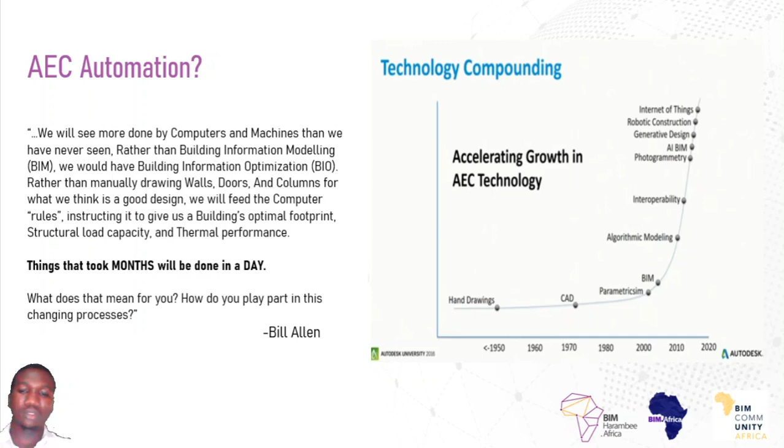So why AEC automation? Of course, we want to quit our boring tasks and automate our workflows, but I believe there's much more to AEC automation than just automating your workflows. So let's discuss AEC automation first.

When we discuss AEC automation, we can never neglect two terms: quality and time. When we discuss quality and time, we always think that when we try to automate our workflows, we get lesser quality because we spend much more time on our projects. Or sorry, we tend to spend lesser time on our projects, which is wrong.

AEC automation provides you the ability to get much better quality for your project in a shorter time. So taking a look at the two graphs below.

We have three projects, on the left without automation and on the right with automation. On the left, we have a base level of quality from automation and standardization, which is BIM. On the right, we had reduced diminishing returns and shortened project completion time frames, that is with automation.

So it's quite evident that all three projects took the whole time frame, and of course that doesn't guarantee much better quality for your project or a better result quality.

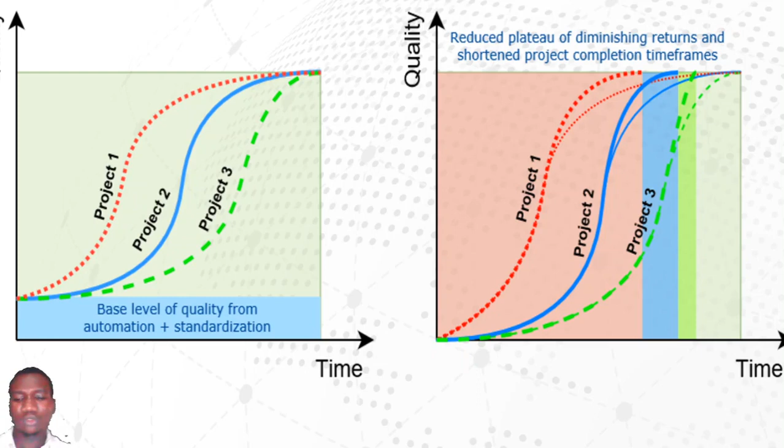So taking a look further, we have a bar chart where the first is no automation in the design process, and the second is with automation in the design process.

So from preliminary BIM modeling to detailed BIM modeling to information management to documentation, just imagine how much time was saved from automating your workflows. Of course, the reasons for automating your workflows are many, and this is just with regards to quality and time.

So when we discuss automation, take a look at documentation. Many of us tend to employ BIM, but we don't take full advantage of BIM. Just like with automation, we employ automation but don't take full advantage of it in the AEC space. If you look at documentation, a lot of us involve ourselves in what I would call Revit management, not actually BIM management, because we say we employ BIM in Africa, but we go through manual design processes and manual documentation processes.

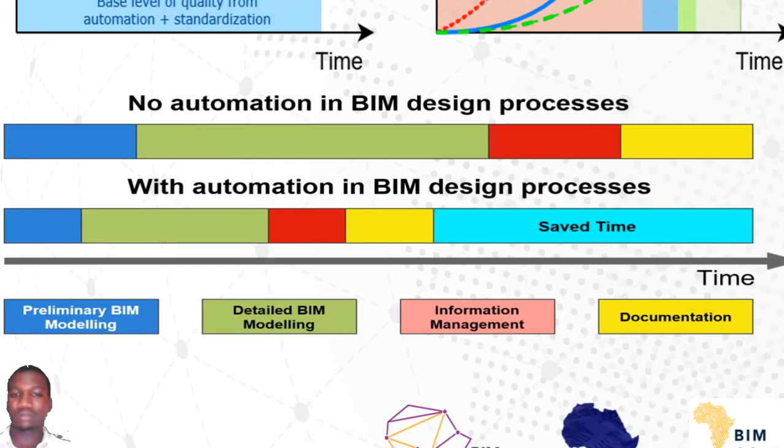So let's move on to why we automate our workflow, aside from just quality and time. Of course, it's a great way to upskill, to standardize your projects, to improve accuracy, eliminate risks and redundancies, enable parameterization, easier collaboration, and increase speed, efficiency, and productivity, among many others.

So these are just a few reasons, aside from quitting the boring tasks, for why you can automate your workflows. Imagine, it's a great way to upskill so you don't become irrelevant to the AEC industry over time, to create standards for your projects, to improve accuracy, and eliminate risks of human errors and redundancies.

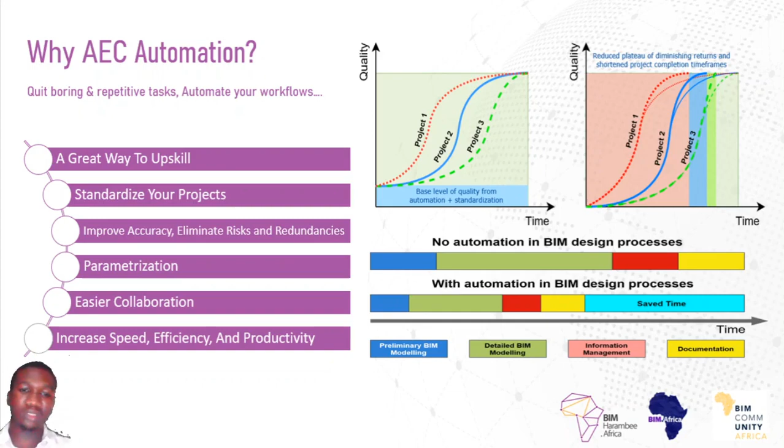Parameterization being the fact that you have to create so many solutions depending on the parameters or input sets. This allows easier collaboration, increasing speed, efficiency, and productivity.

So let's move on to AEC automation. Any difference? What makes the AEC industry spectacular, and why is AEC automation much better than just bare automation? The AEC automation tends to combine various industries to form what is called the AEC industry.

We have the freedom of implementing various technologies in our AEC space, ranging from BIM to digital twins, IoT, AI, ML, VR, AR, robotics, among many others. All these form what is called AEC automation. Just imagine the freedom we have to provide much more effective and efficient results.

It's quite evident that the African economy is quite slow in implementing technologies, which I believe is a much more reason for this topic—for you to spark your creativity and enthusiasm towards implementing what you learn in this session.

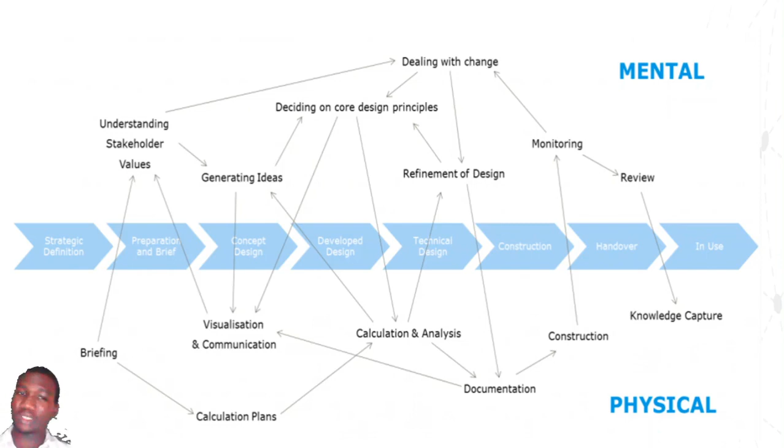Documentation, calculation analysis, calculation plans, among many others. Then we move from strategic definition to preparation and brief, concept design, develop design, technical design, construction, handover, in use. Just imagine having to deal with change all through these stages—and that's what that means for you, and that's the flexibility of computational design for you.

So what is computational design? Basically, computational design is a change in the medium of design expression from geometry to logic. Rather than going through manual processes, it's just for you to feed the computer rules, then you get your results based on the inputs or parameters set for the computer.

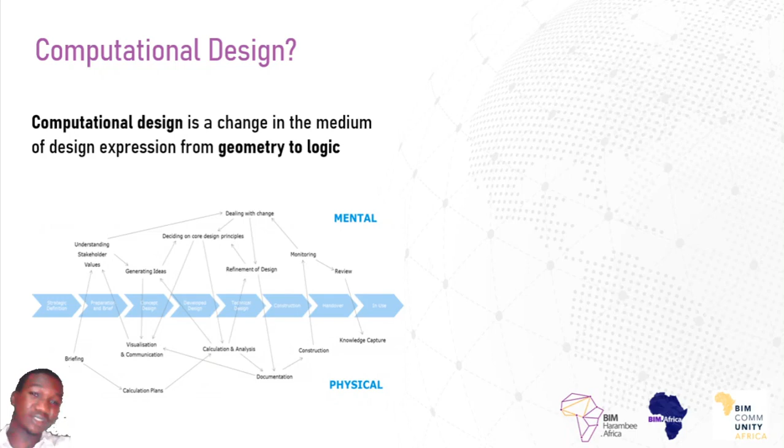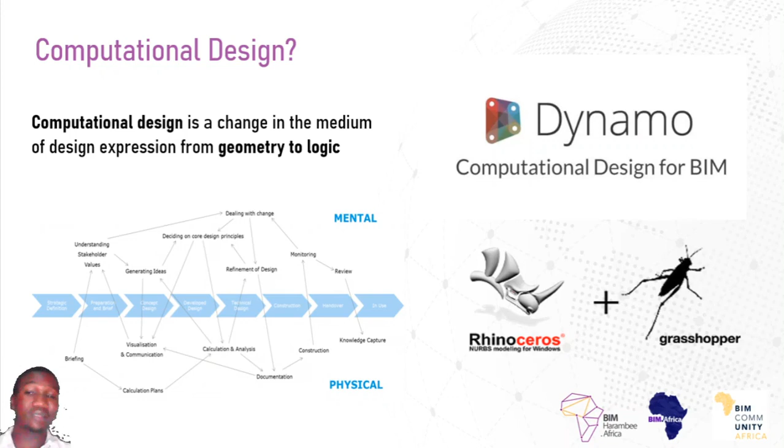So we have computational design tools for BIM: one being Dynamo, created by the Autodesk team, and second, the most popular, being Grasshopper, created by Robert McNeel and Associates. These are the two most popular tools for computational BIM or computational design in the AEC space.

So moving on, let's talk about Dynamo for Revit. It's of course a gateway to parameterization. Where can you find Dynamo? You can either get it from within Revit, or download Dynamo as a sandbox—just a standalone—from dynamobim.org or via the Autodesk platforms.

So where can you find Dynamo for Revit within Revit? You can find it under the Manage ribbon, where you have Dynamo and Dynamo Player. The Player allows you to run scripts without opening Dynamo itself. And this is how the interface of Dynamo looks like.

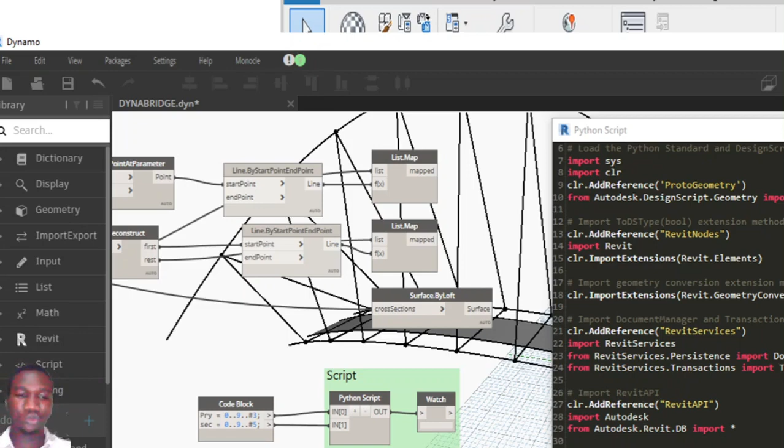How does Dynamo look like? We have the ribbon, we have the search button where you can get access to various nodes. Dynamo is just made of nodes and strings, and it's very easy to use—it takes no time before you learn to create complex scripts or provide complex solutions.

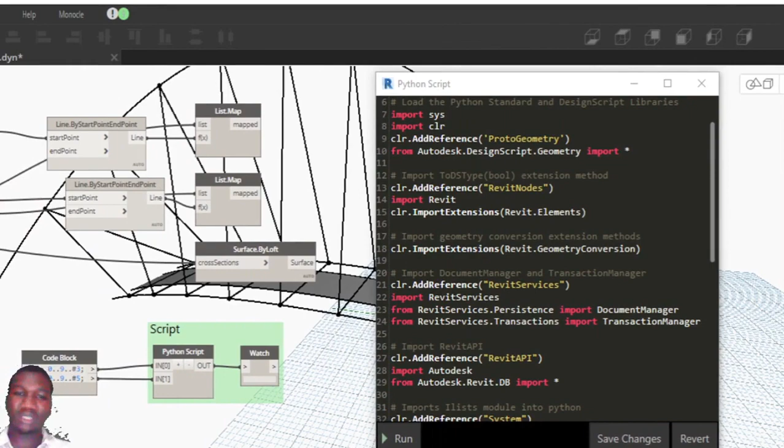We have the run button where you can be in either manual or automatic mode, and Dynamo also allows you to run Python scripts within the environment. We also have the 3D geometry preview, which allows you to switch between either the script or the geometry itself.

So as earlier said, we have the ribbon, we have the add-ons where you can either install packages from within Dynamo itself or dynamobim.org, among many others.

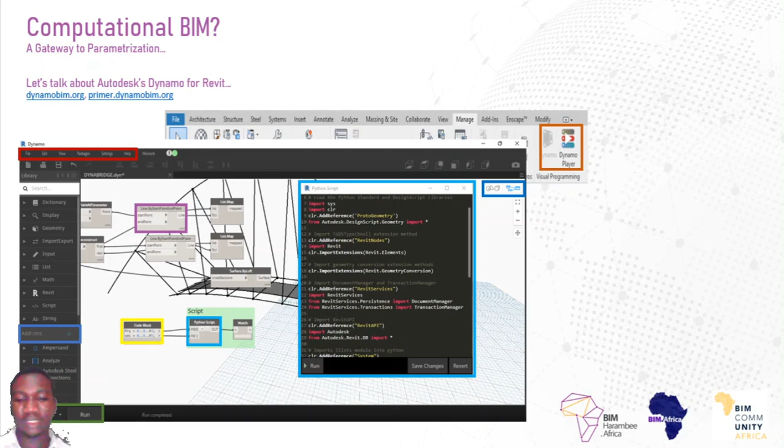So how does Dynamo interact with Revit? This is my little explanation of how Dynamo interacts with Revit and how Revit interacts with Dynamo. As Dynamo goes from interacting with the Revit API to Revit, it's a cyclic process, and either Dynamo interacts with player and or with Python itself. So it's a simple interaction to see how Dynamo interacts with Revit and how you're able to access data via the Revit API using Dynamo and or Python.

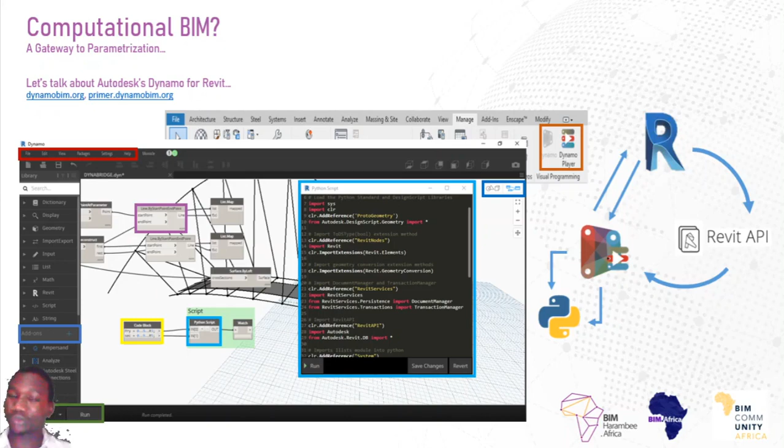So where to start with Dynamo? The best place to start is through the primer, which you can access via primer.dynamobim.org. I would say it's like a Bible for Dynamo where you can get everything you need to know as a beginner. I'm very assuring that once you go through the primer, you'll never be disappointed, as you find everything you need to know with regards to computational BIM or computational design, and how you can begin from creating simple workflows to creating complex workflows for the AEC industry.

Moving on, you can also start with Dynamo via the Dynamo forum, where you can meet various professionals and discuss with them. So I advise you not to just dive into Dynamo from then, expecting solutions to your problems. It's advice for you to dig into your problems, try to view what you're facing, then try to provide solutions yourself before going to the Dynamo forum. You might be lucky to find solutions, and you might not be lucky.

So other learning resources include YouTube, Autodesk University, and Think Parametric. There are so many YouTube channels which you can learn from, like Revit Kid, Aussie BIM Guru, and Melinda Carr, among many others. There are so many speakers that present topics with regards to Dynamo and computational design on the Autodesk University platform. And Think Parametric provides you with various courses to which you can get started with computational BIM or computational design for Dynamo.

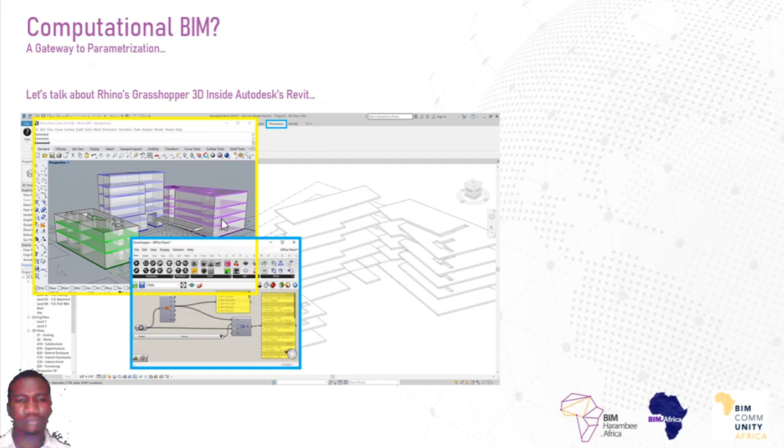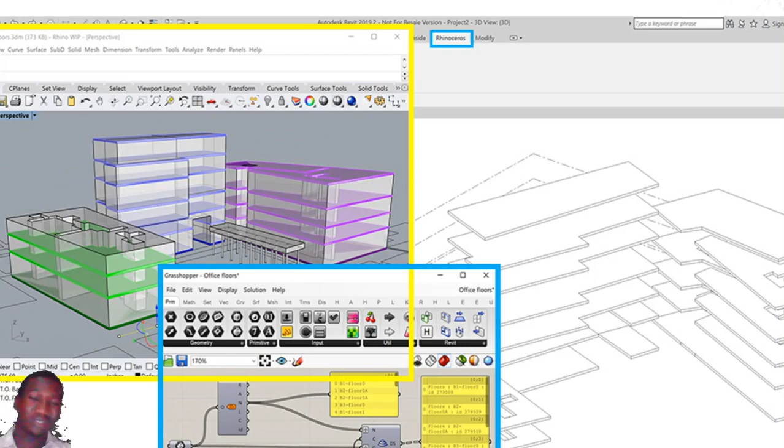So how does Rhino Inside look like? Let's take a look. So we can access Rhino after installing the add-on, via the Rhinoceros tab, and this is how it looks like. You can access both Rhino and Grasshopper within Revit to automate your tasks. Just imagine the power of having both Dynamo and Rhino in one software. Imagine the power you have.

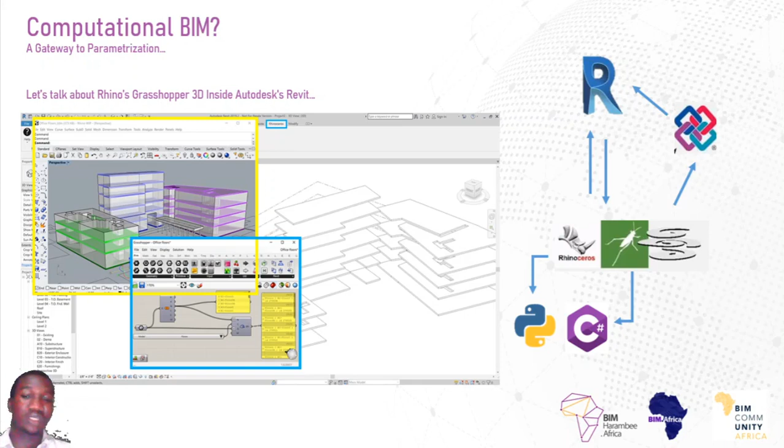So how does Rhino interact with Revit? I would say Rhino interacts directly with Revit or via the IFC file format, and Rhino can also interact within itself via Python script or C Sharp. Also, just like how Dynamo tries to interact with Python itself to access the Revit API, you can also do that within Grasshopper via Python or C Sharp.

So we're going to start with Grasshopper 3D. I'll recommend you start with Grasshopper via the tutorials page on their website. There are various tutorials for you to go through and get the basic understanding of Grasshopper. But I also suggest you have at least prior knowledge of the essentials of Rhino before moving into Grasshopper. Just like you need basic knowledge of Revit before diving into Dynamo, it's required for you to have prior knowledge of Rhino before diving into Grasshopper also.

And just like the Dynamo forum, you have the Grasshopper forum or Rhino forum, where you can meet various professionals with regards to Rhino and Grasshopper, ask questions, and find solutions to your problems also, likewise the Dynamo forum. So other learning resources you have are YouTube, Think Parametric, and ModeLab. ModeLab has created the Grasshopper primer, which is very thorough and a great starting point for you to dive into Grasshopper 3D and begin computational design.

So Revit macros, what are Revit macros actually? I would say Revit macros are user-created commands created in the Revit API, developed in C Sharp, and created in an open source IDE which is integrated into Revit. So what is Revit macros? I believe it's just a plain definition, and let's see what Revit macros does for you within Revit.

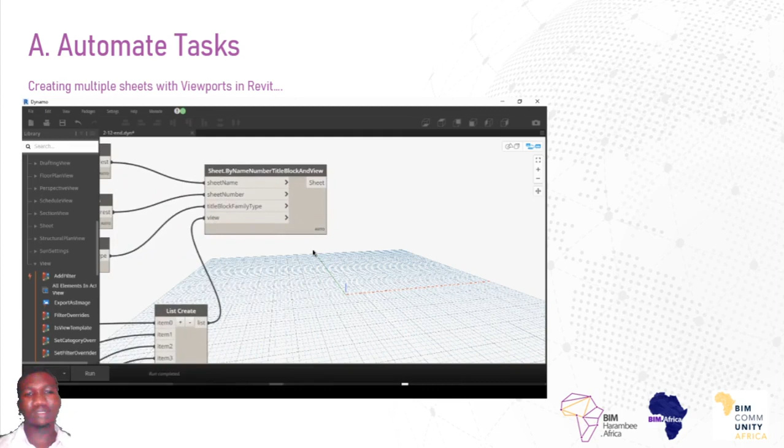Just imagine how fast we're able to create various scripts within Dynamo, just with a few strings and nodes.

So other suggestions for you include flipping grid heads, changing text case, renumbering elements, batch insert families, add revisions to multiple sheets, among many others.

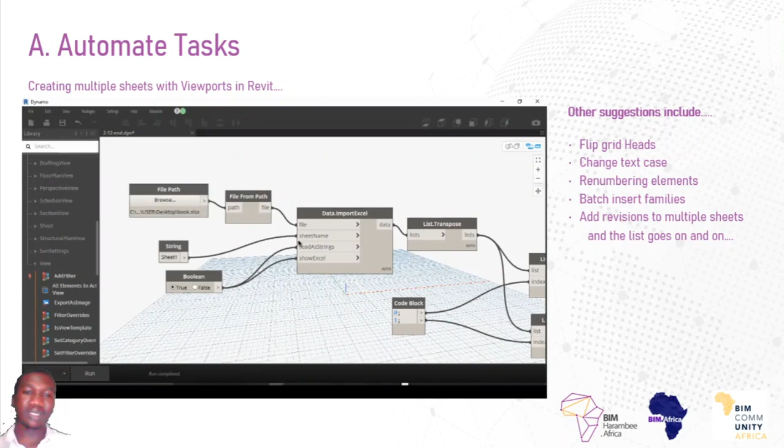I would love to say the limits, but there's no limit to what you can do within Dynamo. Dynamo is limited based on your knowledge, and whatever you can do within Revit, you can do within Dynamo. Thanks to Python within Dynamo, you're able to extend the usability of Dynamo and access the Revit API directly.

So moving on, we're able to create complex geometry within Dynamo just with a couple of strings and nodes. Just imagine creating geometry like this within Revit itself, and the amount of time you'd spend creating geometry like this.

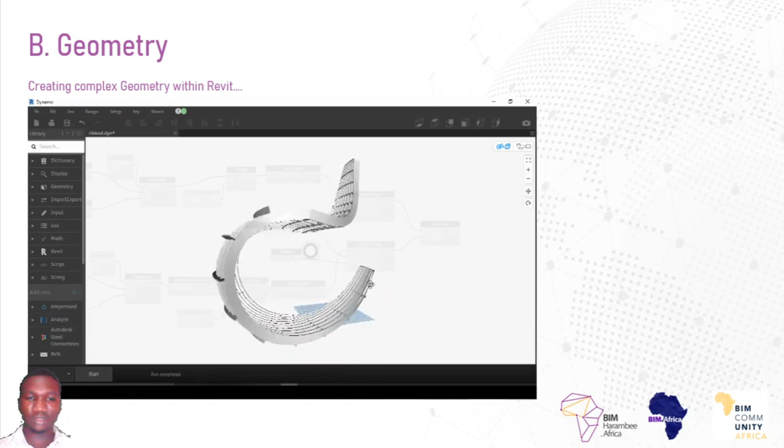And in just a few seconds you run the script and you've had your result. And of course the script can be used in various projects, all depending on the complexity of your script and how you create it for the use case.

So also with Dynamo and Python, you can access the Revit API to get data from Revit and interact with the back end data from Revit.

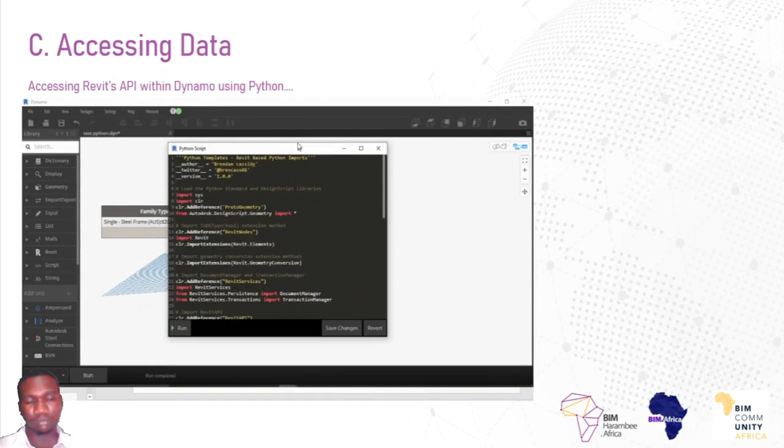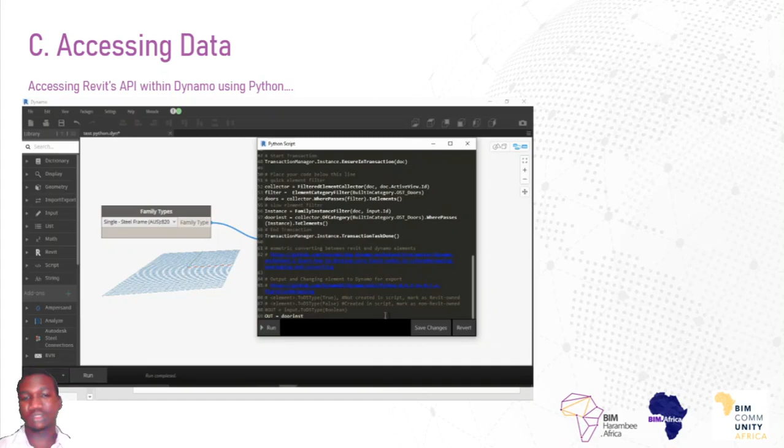Or with a few lines of code, you're able to create scripts and just access backend data within Revit, within Dynamo itself.

So in this script, I was able to generate all doors from this project, and from the script we have 8 doors, and that was something I was able to get within Dynamo itself.

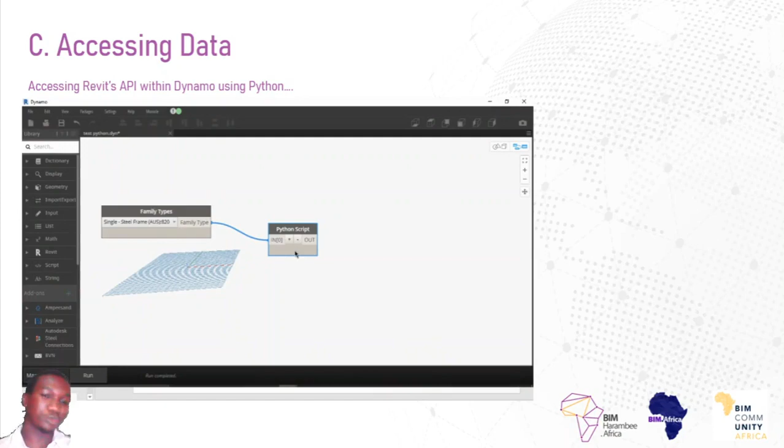So moving on, we're able to use Dynamo or either Grasshopper to test performance using Karamba 3D, a parametric engineering tool, which is a case study we are taking here.

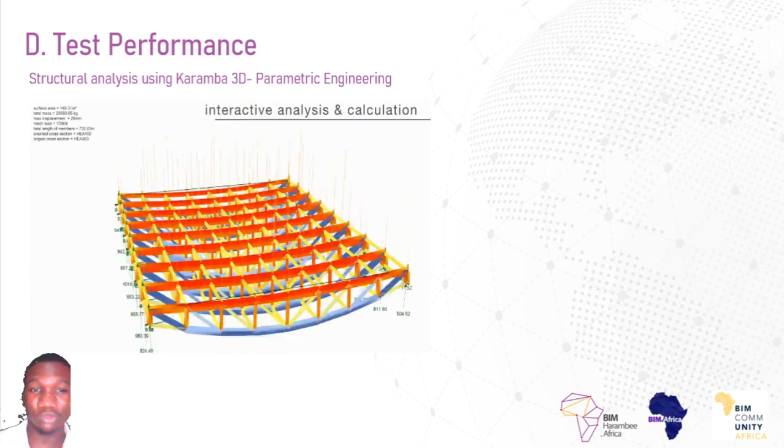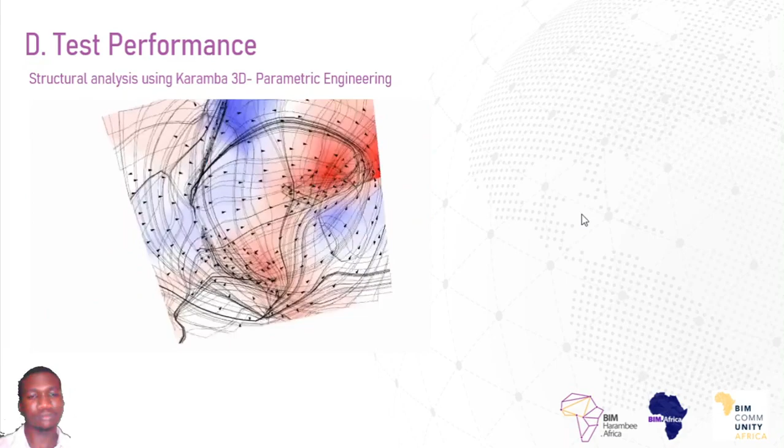So with Karamba, we are able to attain parametric setups, and provide structural loading capacity, structural loading analysis, and among many others: optimization, genetic algorithms and optimization.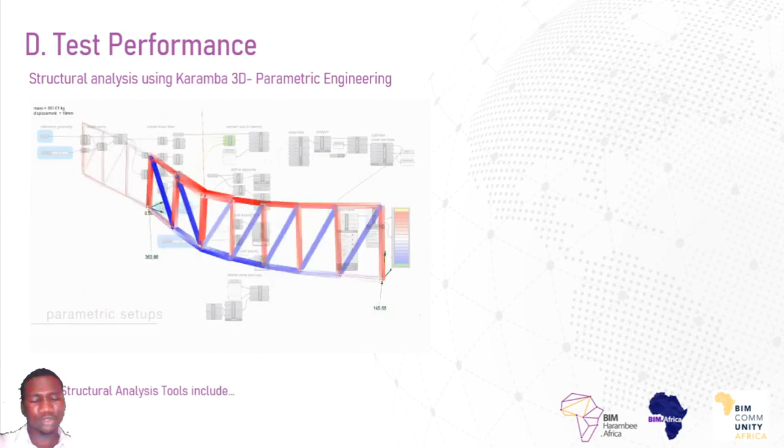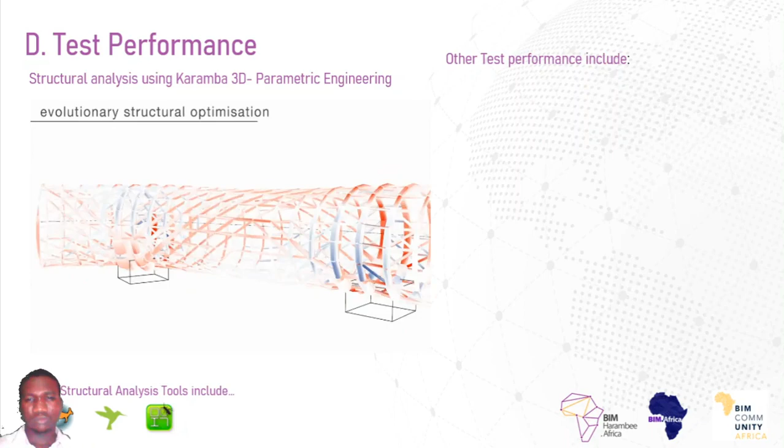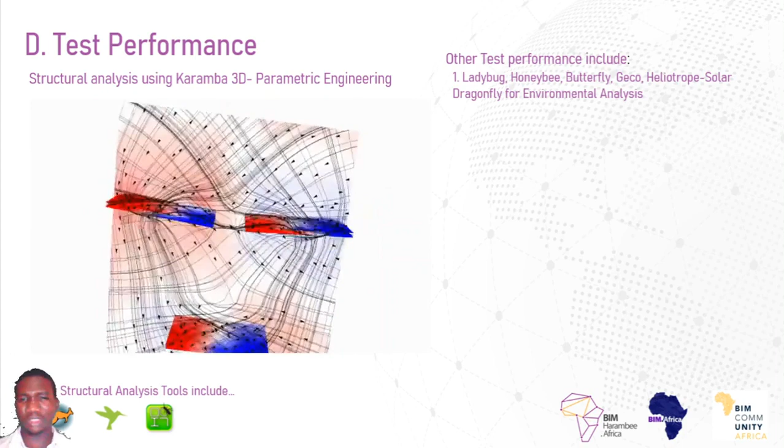So other structural analysis tools include Kangaroo, Human, and Booleans, which are all within the Grasshopper tool. Other test performance tools include Ladybug, Honeybee, Butterfly, Geco, Heliotrope Solar, and Dragonfly for environmental analysis.

So just within Dynamo, we're able to obtain solar analysis, sun analysis, and comfort analysis, among many others.

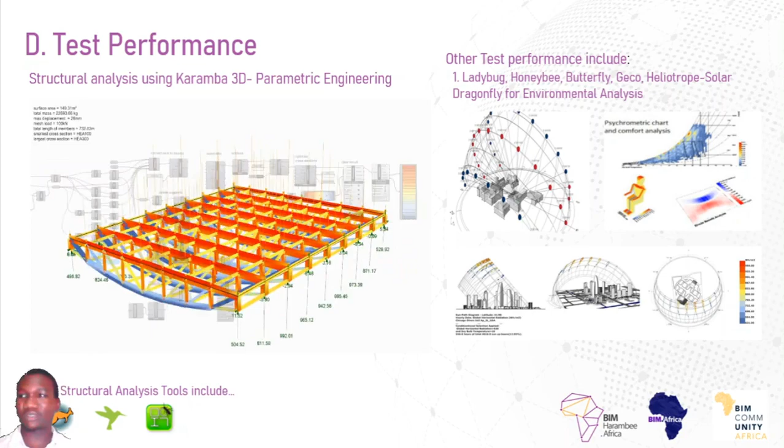So, generative design. Generative design is an iterative process which quickly provides design alternatives based on goals, constraints, and inputs we give, to provide you higher performing options for data-driven decision making.

So in this definition, we are trying to understand basic concepts: one being iterative process, also quickly providing design alternatives based on goals, constraints, and inputs to give you higher performing options for data-driven decision making.

So how does generative design work? Well, of course, you generate, then you analyze, then you rank, evolve, explore, integrate. It's all a cyclical process, so you generate your results based on various parameters you set, analyze them, rank them based on your needs, evolve them, or if they suit your needs, explore various other options, then integrate them into your workflows if you so wish.

And this is just a simple generative design process which shows how it works and how you have to generate various options within seconds.

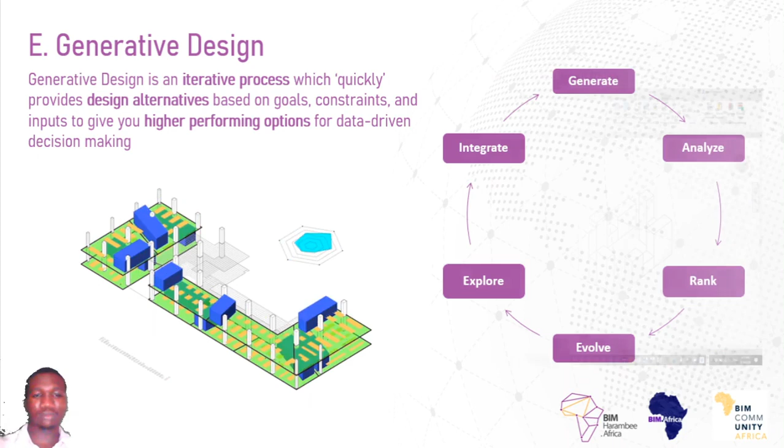So this is a script by Aussie BIM Guru where he was able to compare the same script within Grasshopper and Dynamo, the left being using Refinery in Revit, and the right being from Galapagos in Rhino Inside.

He was able to generate at least 150 results within seconds, and imagine the speed of Refinery being able to create results, a random result based on your parameter sets, your input, or your constraints.

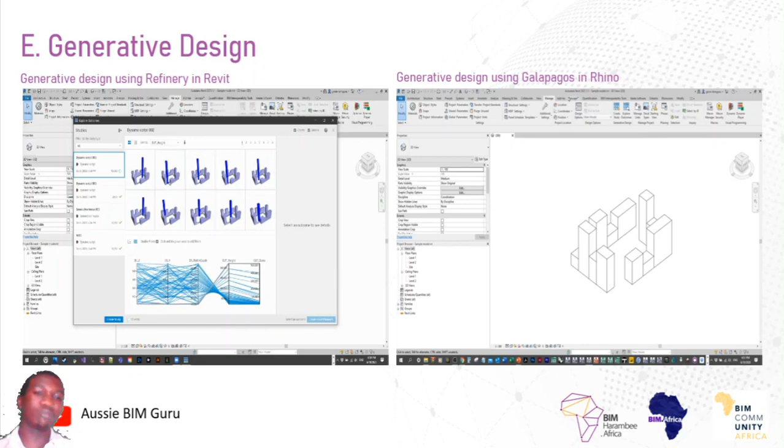And you're able to explore from at least so many results with regards to your needs and be able to integrate them into your workflows.

Let's take a look at how you can do the same within Rhino Inside.

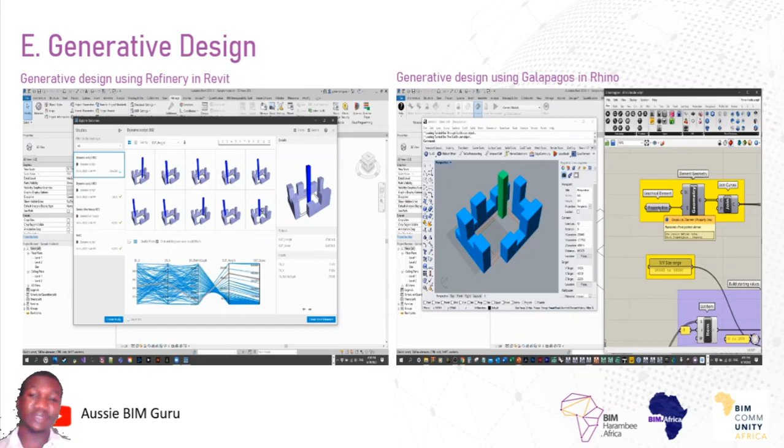It's quite evident that Rhino Inside Galapagos is a bit faster, and over time it tends to create a much more quality result. The more you run the script, the more you get much better results with regards to your parameter sets, input, goals, or constraints.

Just imagine the power you have implementing these two powerful programs into one software, and being able to provide solutions to problems in the AEC industry.

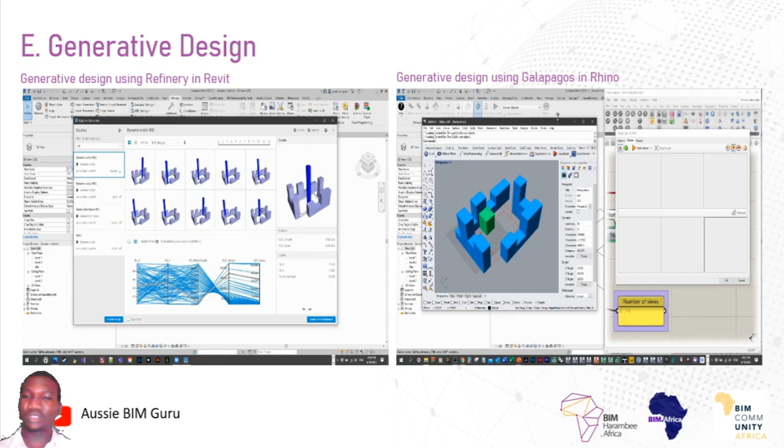So what is my conclusion? I'll say the future of BIM might not be BIM, and be prepared, it's coming faster than you think.